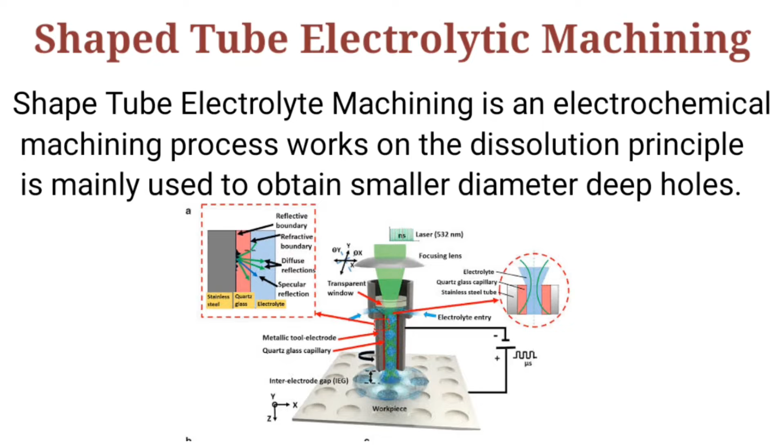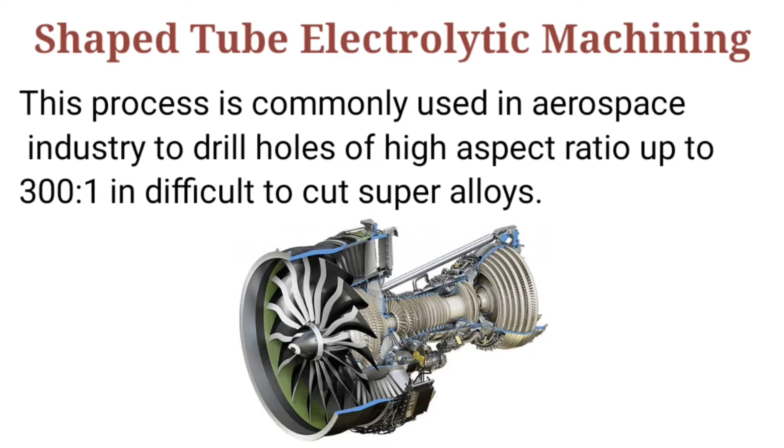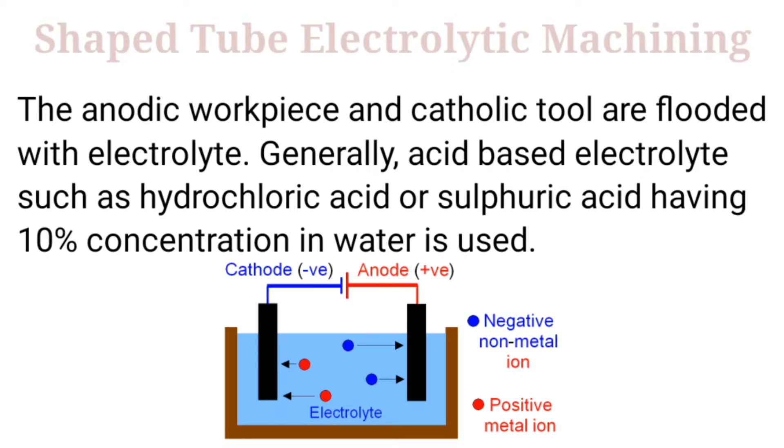This process is commonly used in the aerospace industry to drill holes of high aspect ratio up to 300:1 in difficult to cut superalloys. It works under the electrolytic principle. The anodic workpiece and cathodic tool are flooded with electrolyte, generally an acid based electrolyte such as hydrochloric acid or sulfuric acid.

In this process, through the combination of chemical and electrical energy, the material is removed by electrochemical dissolution action.

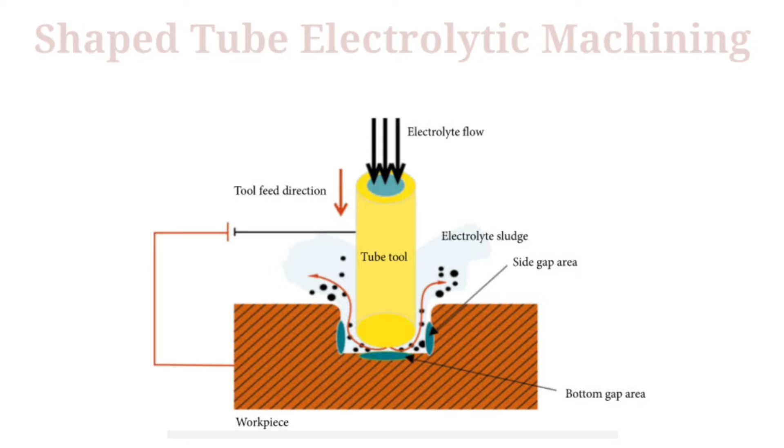The figure shows a schematic of the STEM process. The tool used in STEM is a hollow shaped tube with an insulating coating all over the exterior surface except at the tip of the tool.

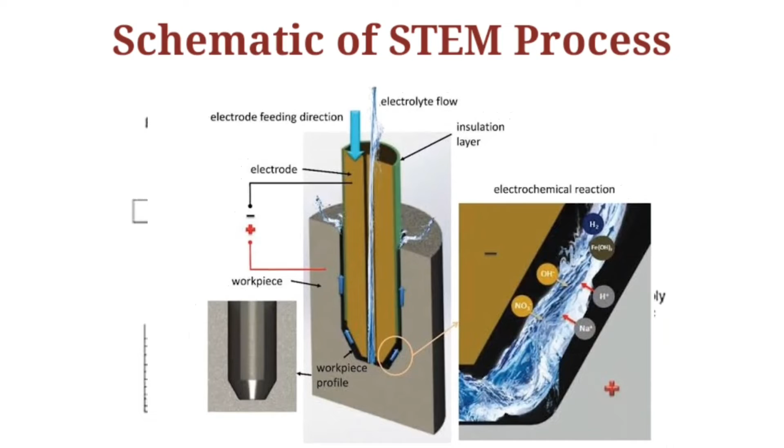A servo system is used to maintain a constant gap between the tool and workpiece. A voltage of 5 to 15 is applied. The gap at higher voltage causes boiling of the electrolyte, which eventually damages the insulation coating and hence affects the geometrical and dimensional accuracy.

The tool is given a constant feed value to maintain the constant machining gap. The feed rate is about 1.5 mm per minute. Using the STEM process, small holes of 0.76 to 1.6 mm diameter with a high depth to diameter ratio can be produced in electrically conducting material.

However, it is difficult to produce such a small size and high aspect ratio hole using ECM, as insoluble precipitates produced during the dissolution process obstruct the electrolyte flow path.

Further, the electrolyte is collected in the tank and is again reused through a pump, filter and heat exchanger arrangement. The pressure is calculated with the help of a pressure gauge and again transferred toward the tool.

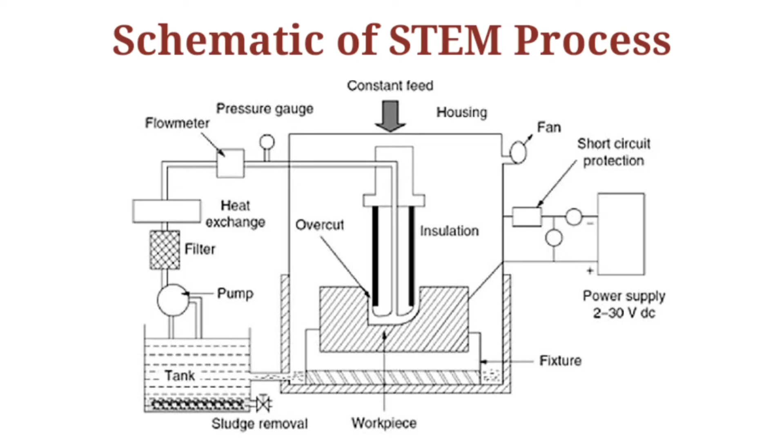The parameters which directly affect the quality of the process are: first, the machining current, which should be a maximum of 600 ampere. Concentration should be 10 to 20% within the water.

Temperature should be 35 to 40 degrees Celsius for sulfuric acid and 20 to 25 degrees Celsius for others. Pressure should be maintained up to 275 to 500 kilopascal. Voltage should be a forward voltage of around 8 to 14, required for maximum current.

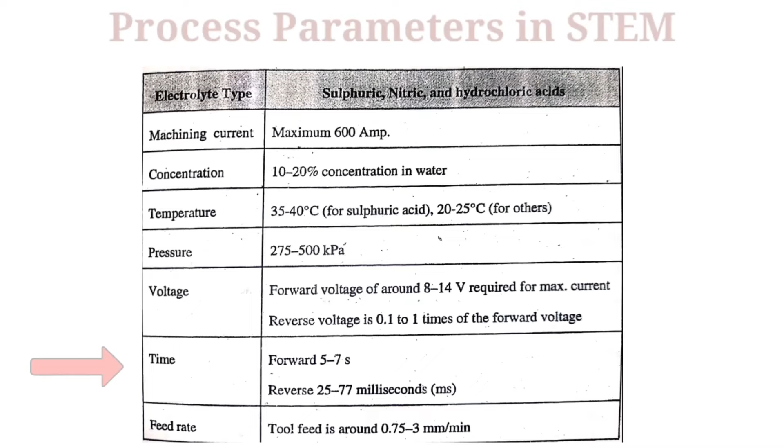Reverse voltage is 0.1 to 1 times the forward voltage. Next is time: for forward action, 5 to 7 seconds, and for reverse action, 25 to 77 milliseconds. Next is feed rate, that is, tool feed is around 0.75 to 3 mm per minute.

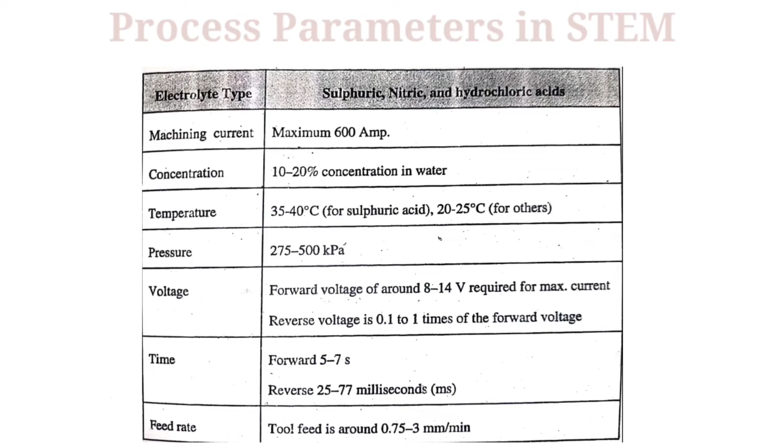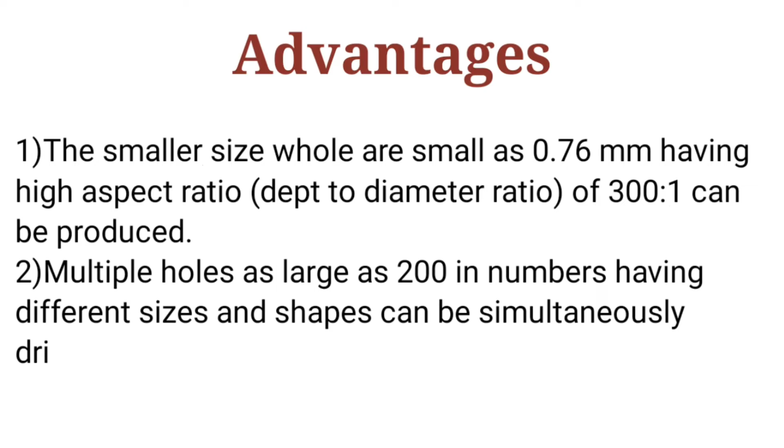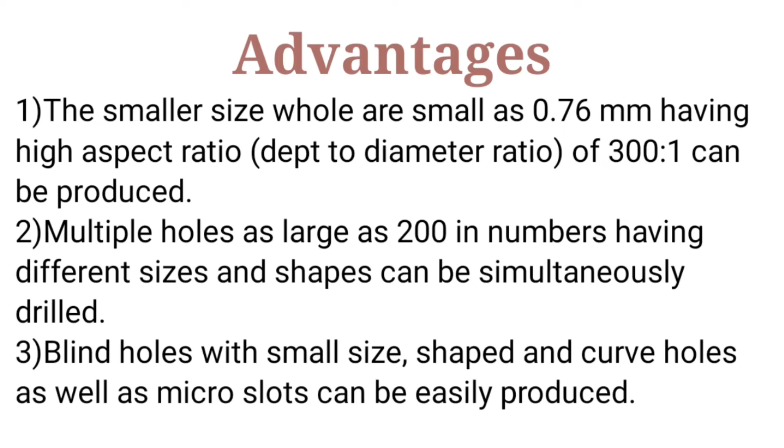Advantages: smaller size holes as small as 0.76 mm having high aspect ratio of 300 can be produced. Multiple holes as large as 200 in number, having different sizes and shapes, can be simultaneously drilled. Blind holes with small size, shapes, and curved holes as well as micro slots can be easily produced.

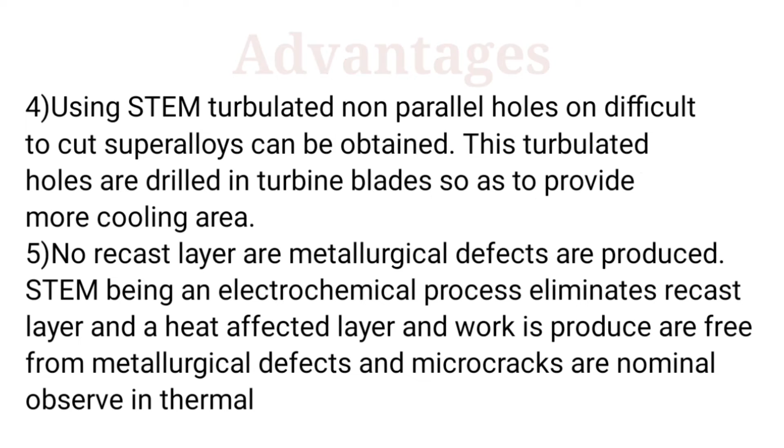Using STEM, turbulated non-parallel holes on difficult to cut superalloys can be obtained. These turbulated holes are drilled in turbine blades so as to provide more cooling area. No recast layer or metallurgical defects are produced.

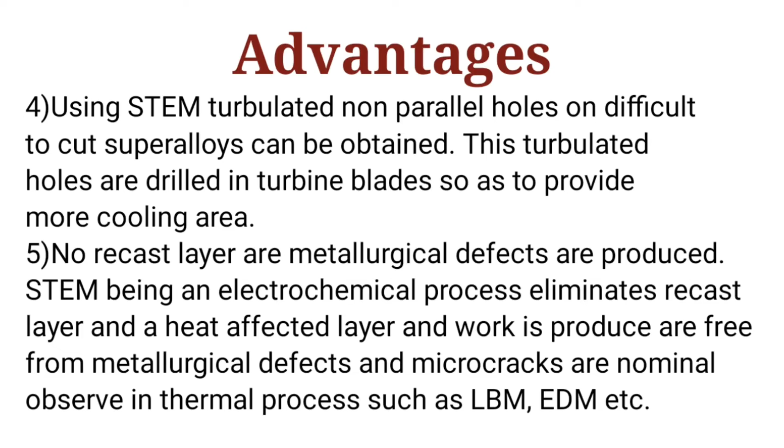STEM, being an electrochemical process, eliminates the recast layer and heat affected layer, and the work is produced free from metallurgical defects and micro cracks normally observed in thermal processes such as LBM, EDM, etc.

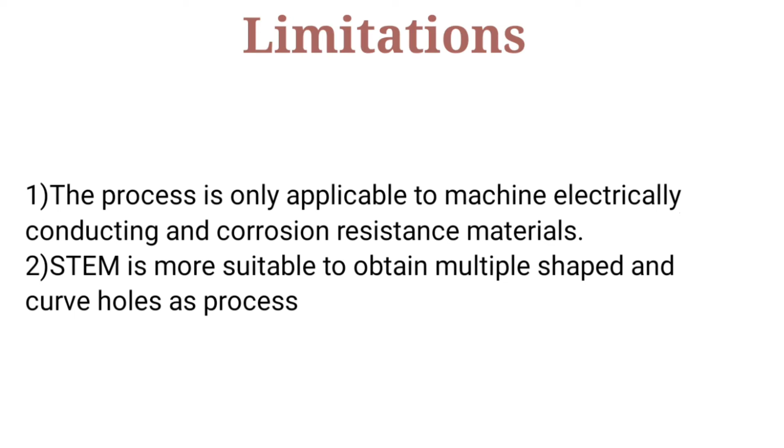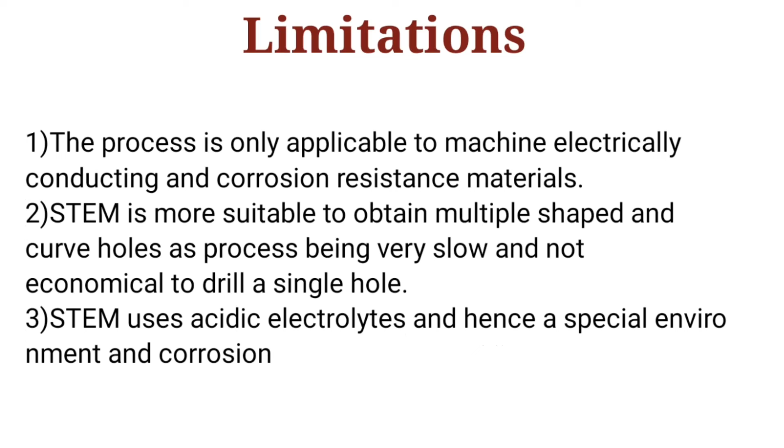Limitations: the process is only applicable to machine electrically conducting and corrosion resistant material. STEM is more suitable to obtain multiple shaped and curved holes, as the process is very slow and not economical to drill a single hole.

STEM uses acidic electrolyte, and hence a special environment and corrosion resistant machine components are required. Special care is required to dispose of hazardous waste, and lastly, a special type of tooling is required as the process is complicated compared with other processes such as LBM, EDM and PAM.

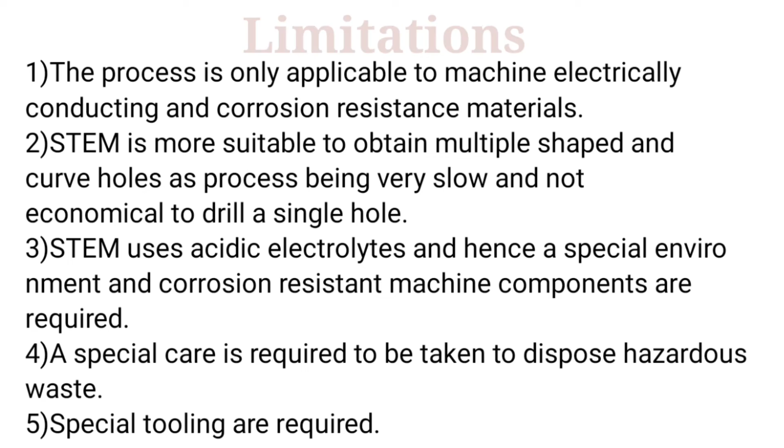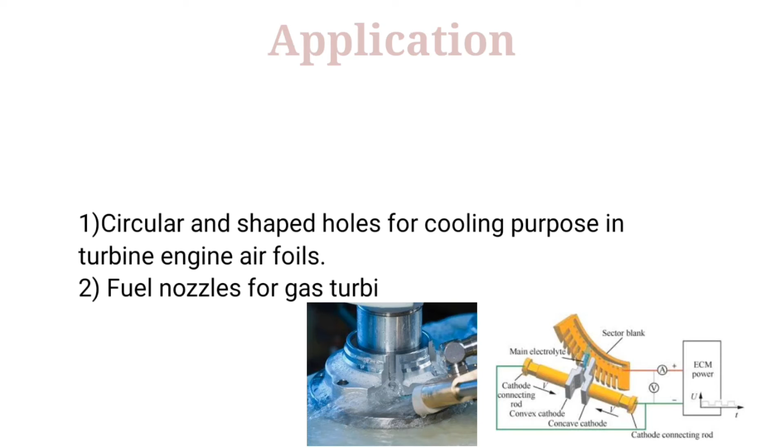Next point is applications of the system. First, circular and shaped holes for cooling purposes in turbine engine airfoils. Next, fuel nozzles for gas turbine and jet engine parts.

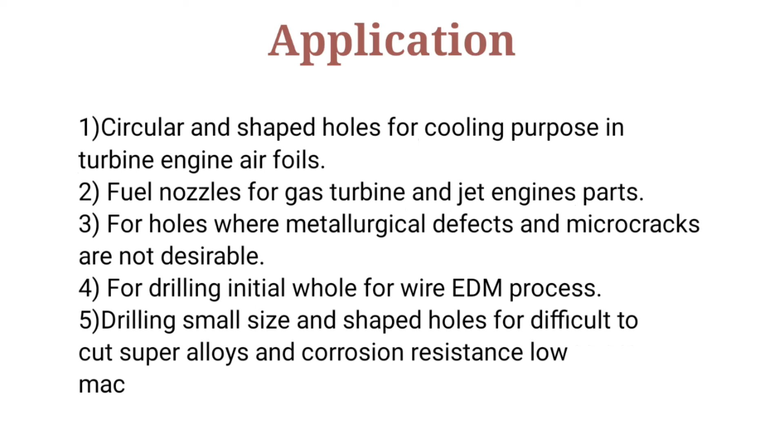Next, for holes where metallurgical defects and micro cracks are not desirable. Also for drilling initial holes for the wire EDM process. Also it is used for drilling small size and shape holes in difficult to cut superalloys and corrosion resistant low machinability metals such as stainless steel.

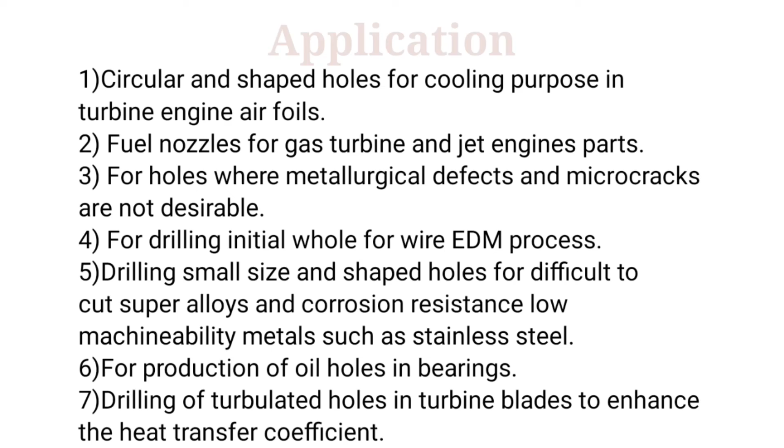Next application is for production of oil holes in bearings, and the last one is drilling of turbulated holes in turbine blades to enhance the heat transfer coefficient.